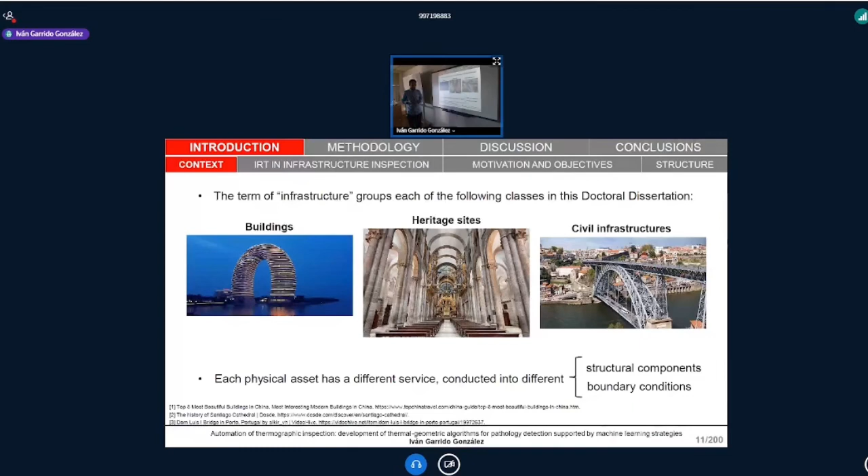In this doctoral dissertation, the infrastructure classes analyzed are the following: first, buildings that provide comfort and habitat to people; heritage sites that evidence the evolution of humanity and provide cultural satisfaction and economic benefits through tourism; and civil infrastructures that enable communication among people. Each physical asset has a different service, different structural components, and different boundary conditions.

In the absence of good maintenance, different surface and subsurface pathologies can appear depending on the service provided, the structural components, and the boundary conditions of the infrastructure under study. These forces can damage the structural health of any type of infrastructure, can prejudice the health and comfort of building users, and can increase energy demand in buildings.

The most severe ones are analyzed in this doctoral dissertation: that is, moisture, cracking, thermal bridge, and air infiltration.

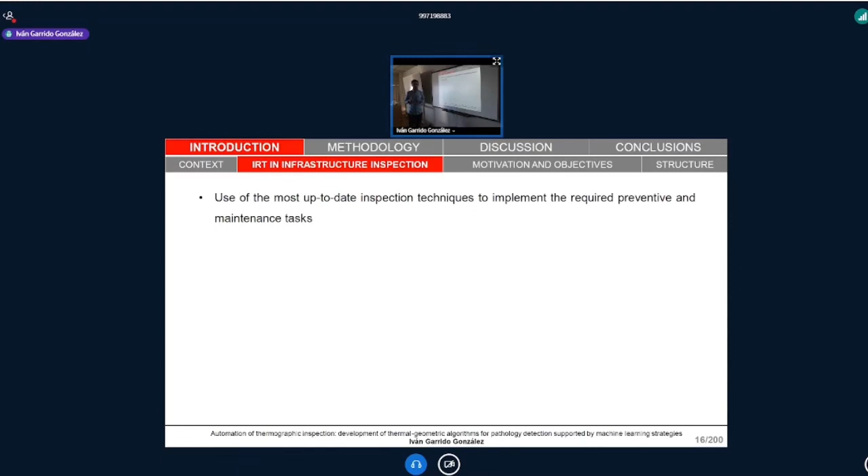For that, the use of the most up-to-date inspection techniques to implement the required preventive and maintenance tasks is necessary in order to avoid or reduce the negative consequences of these pathologies.

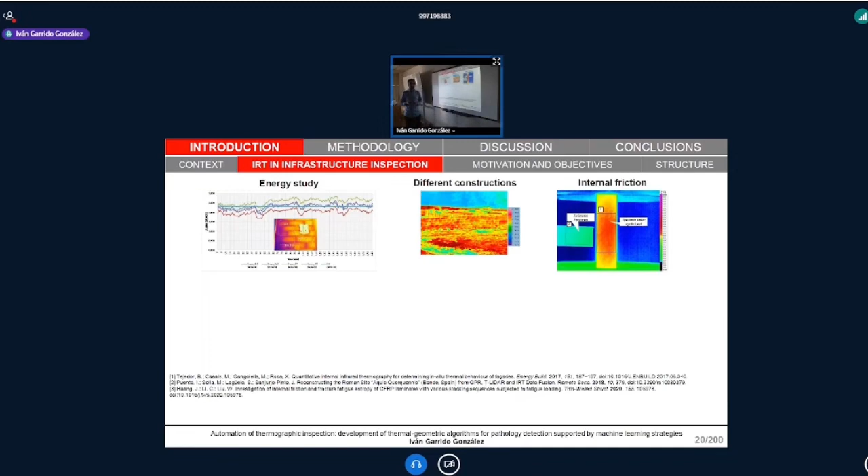In particular, infrared thermography has the ability to identify surface and subsurface pathologies based on the different thermal behavior between a pathology region and pathology-free regions of the infrastructure under study, allowing, for example, to perform an energy study of a building, to differentiate different types of construction in an archaeological site, to investigate internal friction in civil infrastructures under different fatigue loads, and of course to identify the above cited pathologies: moisture, cracking, thermal bridge, and air infiltration.

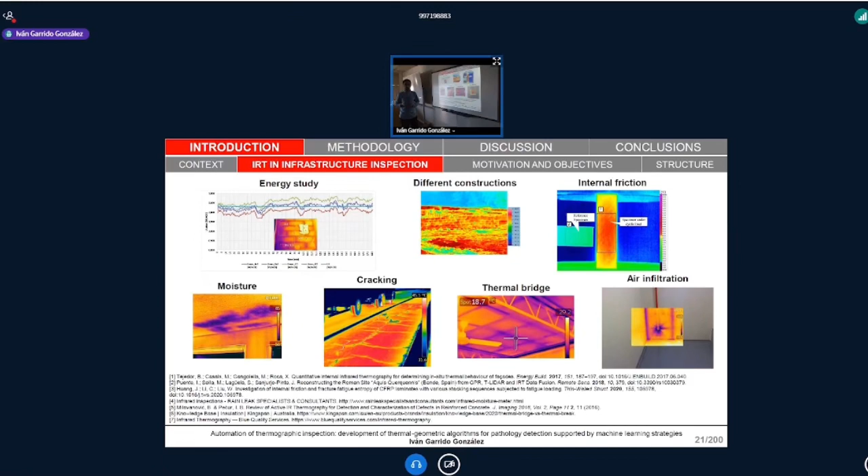So the motivation of this doctoral dissertation arises from the high importance of infrastructures, the high importance of identifying and thermally characterizing surface and subsurface pathologies, especially the most critical ones, and from the benefits of infrared thermography as an inspection technique. This leads to the main objective of this research, which consists of the automation of the automatic detection, delimitation, quantification, and thermal characterization of different pathologies in buildings, heritage sites, and civil infrastructures.

Automatic, due to the following main points. First, due to the benefits of automation in the interpretation of these results, speeding up this interpretation, especially in online inspections, and reducing the possible errors caused by operator subjectivity. Also, due to the increasingly important role of machine learning models in the automation of problem solving, and because automation of infrared thermography interpretation in infrastructure is a recent topic in the state of the art nowadays.

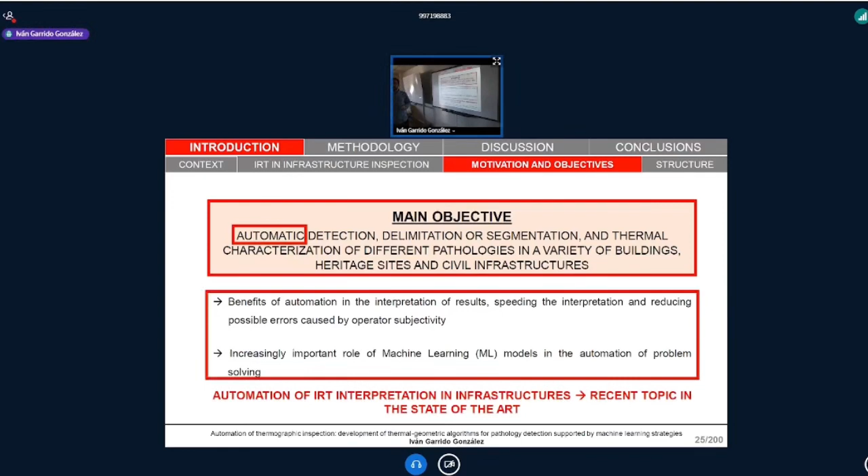This leads to three main contributions of this doctoral dissertation. The first point consists of providing exhaustive reviews of the most recent infrared thermography acquisition and post-processing procedures and infrastructure inspection, in the absence of such reviews in the state of the art.

The second contribution was the development of different new automatic thermal image processing algorithms applied to infrastructures. And finally, the third and last contribution was the presentation of the first combination of automatic thermal image processing algorithms with machine learning models.

This leads to five different specific objectives related to these contributions: the first specific objective relates to the first main contribution, the second to fourth specific objectives relate to the second contribution, and the fifth and last specific objective relates to the third main contribution of this doctoral dissertation.

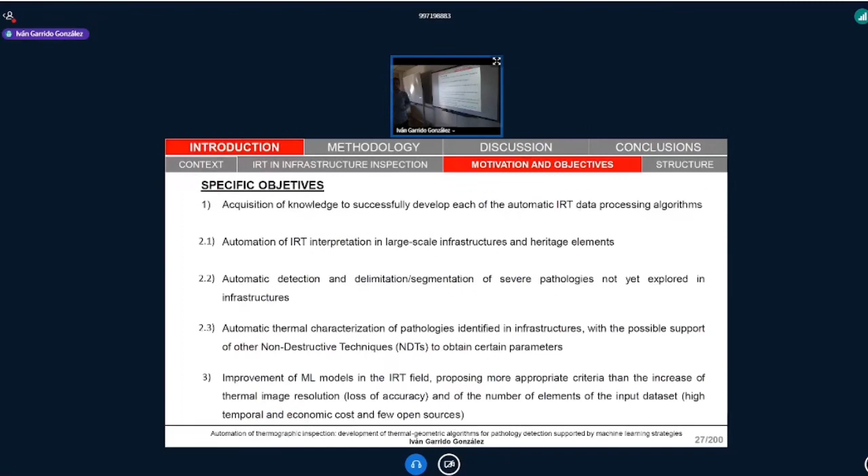So let's move on to the explanation of the structure of the methodology of this research.

In chapter 2, we can see that it covers the two exhaustive reviews explained before. Chapter 3 explains the first automatic algorithm proposed in this research, and chapter 4 presents three different publications covering the second to the fourth algorithms proposed in this doctoral dissertation.

And finally, in chapter 5, it is presented the combination of machine learning models, specifically deep learning models, with automatic thermal algorithms.

So let's move on to chapter 2, specifically to the first exhaustive review published in the following paper.

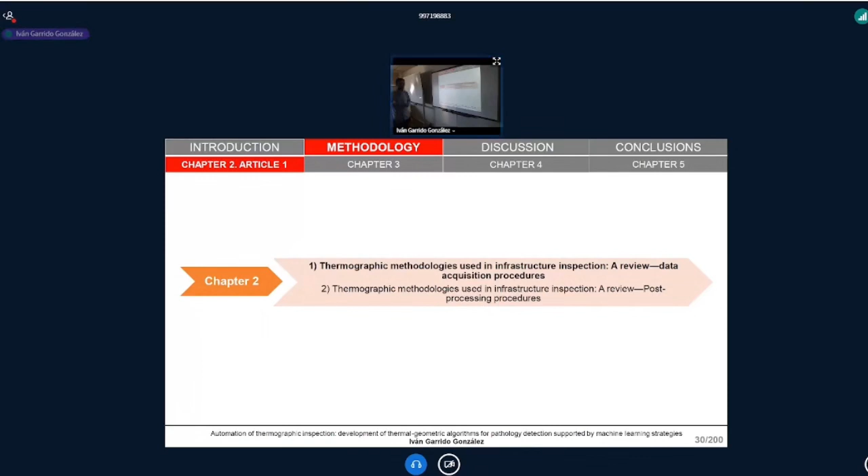The objective of this exhaustive review is the study of the most recent infrared thermography acquisition procedures in infrastructure inspection.

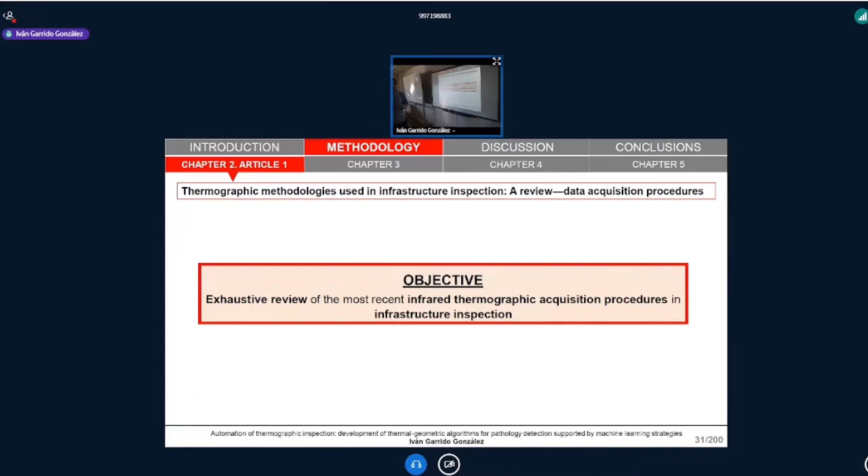The workflow is as follows. Firstly, the different existing infrared thermography approaches in the data acquisition stage when inspecting an infrastructure are searched and described. As a result, two different infrared thermography acquisition modes are found.

The first one, passive infrared thermography, consists of the measurement of the radiation emitted by the body when the body receives thermal excitation equal or less than that generated by solar radiation.

Active infrared thermography consists of the measurement of the radiation emitted by the body when the body receives thermal excitation higher than that generated by solar radiation.

Finally, similarities and differences among the most recent infrared thermography experimental setups are described. As a result, we found that there is great heterogeneity between the different experimental setups.

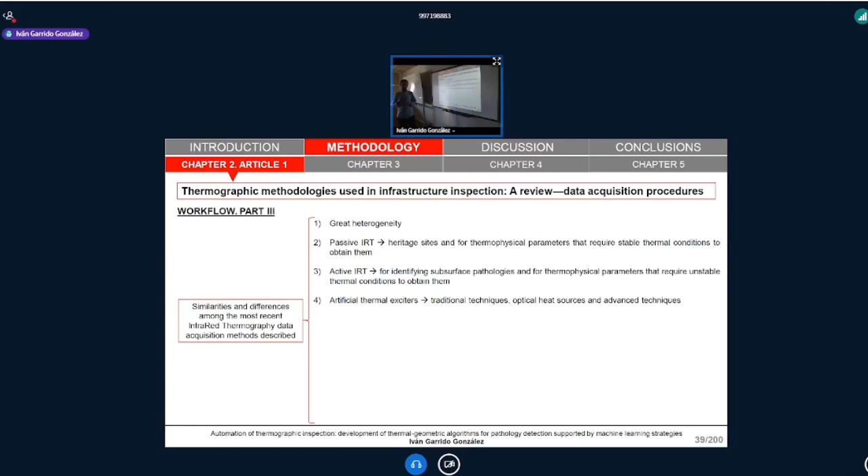But solar radiation is the predominant heat source in passive infrared thermography, especially using this type of natural heat source either during sunrise or sunset for pathology identification, due to the thermal changes reaching their peak during this time.

As for the type of heating, conventional thermography, step heating, pulse thermography, and lock-in thermography are the most common ones.

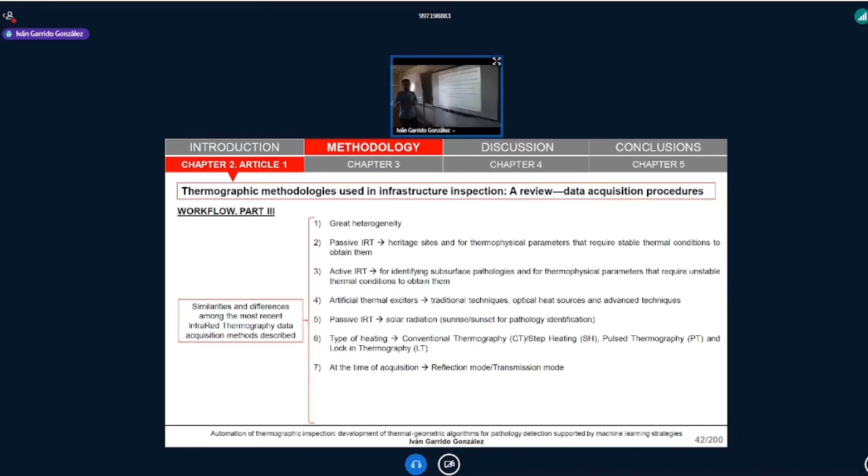Regarding the placement of the infrared thermal camera and the thermal exciter, they can be placed either on the same side of the infrastructure, reflection mode, or on opposite sides of the infrastructure under study, transmission mode.

When the objective is to identify surface pathologies, pulse thermography and reflection mode are the more predominant experimental setups. And when the objective is to identify subsurface pathologies, conventional or lock-in thermography and transmission mode are the most predominant experimental setups.

This first exhaustive review was published in the International Journal Infrared Physics and Technology in 2020.

So let's move on to the second exhaustive review that was published in this second paper.

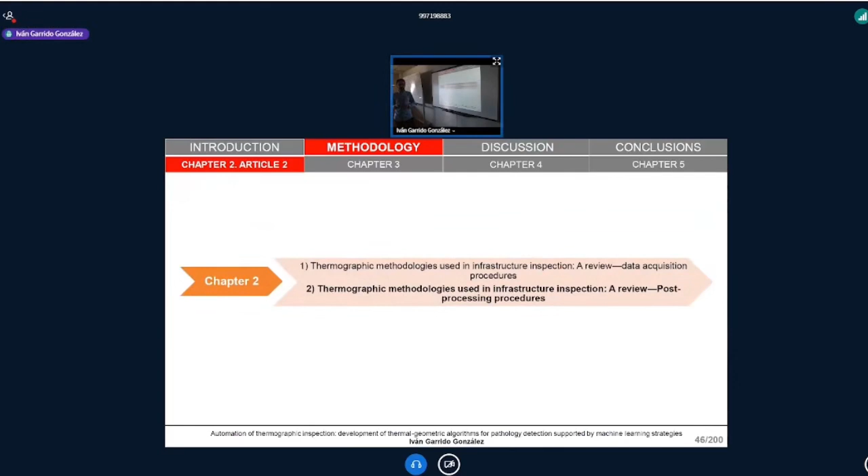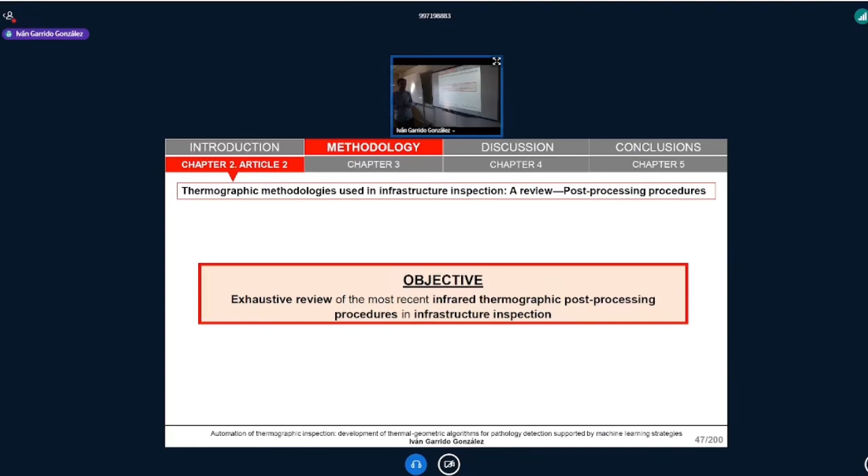The objective of this second exhaustive review is to focus on the more recent infrared thermography post-processing procedures in infrastructure inspection. Here, the workflow is as follows.

Firstly, again, the different existing infrared thermography approaches in the post-processing stage of infrastructure inspection are searched and described. As a result, again, we have two different modes, in this case two post-processing modes.

The first one, qualitative analysis, is when the objective is to detect the position, delimit, or segment the pathology area. And when the objective is to characterize the pathology of the infrastructure or to estimate the pathology depth, the corresponding post-processing mode is quantitative analysis.

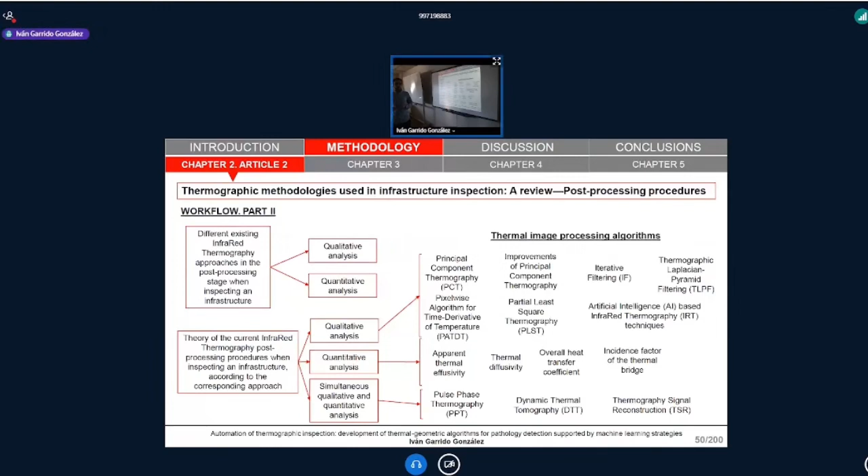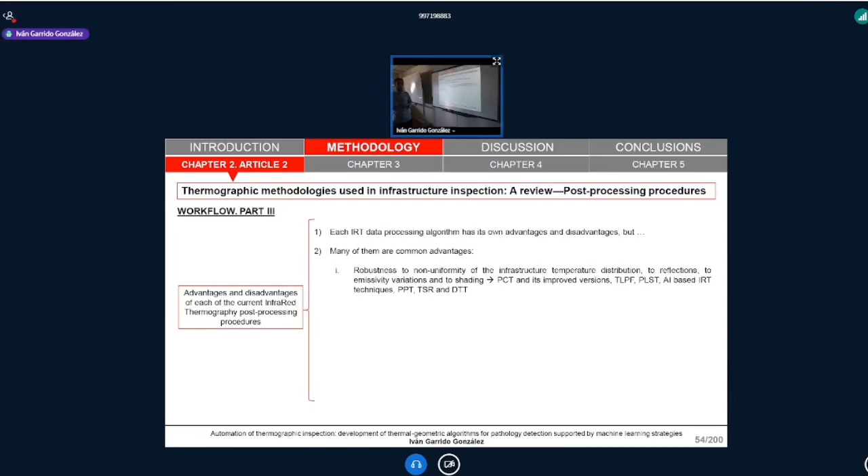However, many of them share common advantages, such as robustness to non-uniformity of the infrastructure temperature distribution, to reflections, to emissivity variations, and to shading. Another advantage is that some algorithms have the ability to perform simultaneous qualitative and quantitative analysis.

Unfortunately, many of them also share common disadvantages, such as the need for a thermal image sequence without the possibility of punctual inspections. Another disadvantage is the absence of delimitation of the contours or segmentation of the detected pathologies, and the need for manual interpretation of the results.

This second exhaustive review was published in the International Journal Applied Energy in 2020.

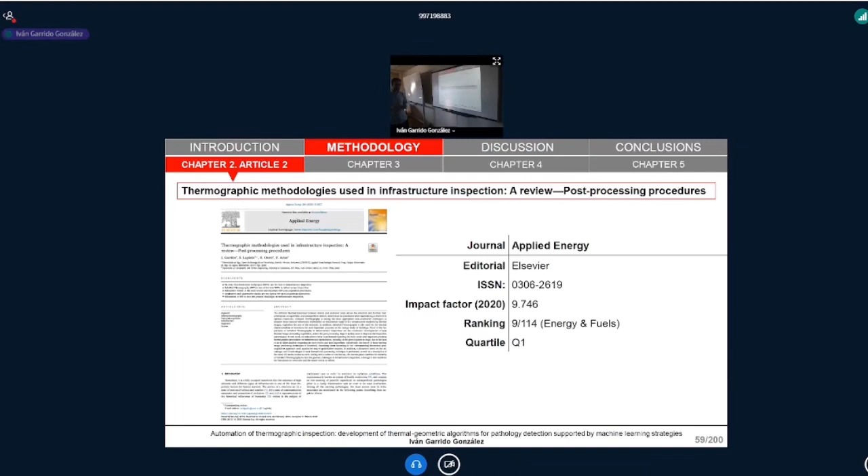So, with the acquisition of the state-of-the-art, we are ready to develop the different algorithms. The first one was published in the following paper, in chapter 3.

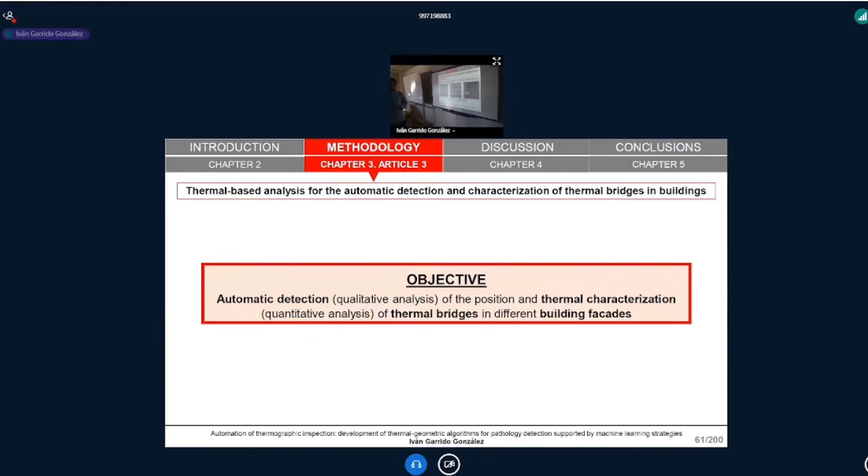The objective of this first automatic algorithm consists of the automatic detection and thermal characterization of thermal bridges in different building facades. For that, different punctual measurements are performed from a mobile ground platform using solar radiation as thermal excitation. The thermal images are processed with pixel values in 8-bit format.

As for the workflow, it is as follows. First, a photogrammetry technique is applied, specifically an image rectification process, in order to correct the projection, perspective, and radial distortion introduced by the lens of the infrared camera on each raw input thermal image. With this, it is possible to calculate the pixel size on each thermal image in metric units, and in this way, the width or height of each thermal bridge in metric units.

Here we can see the core of the image rectification process. It is the equation called plane projective transformation, where the coefficients of the projective matrix are calculated by 4 control points on each thermal image, whose dimensions in metric units need to be known previously.

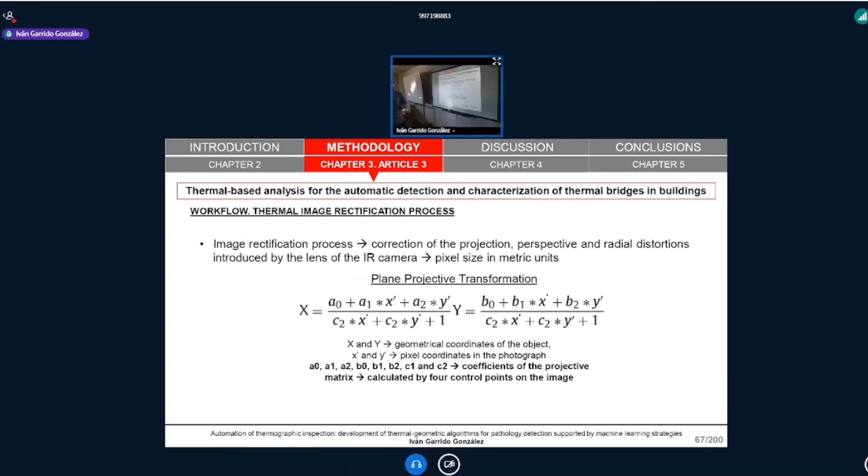Then two one-dimensional median filters are applied on each rectified image in order to reduce noise. Then on each image, different local maximums are grouped into different lines. It should be noted that these lines are candidates for thermal bridges, consisting of a line containing groups of pixels with temperature values very different from their surroundings.

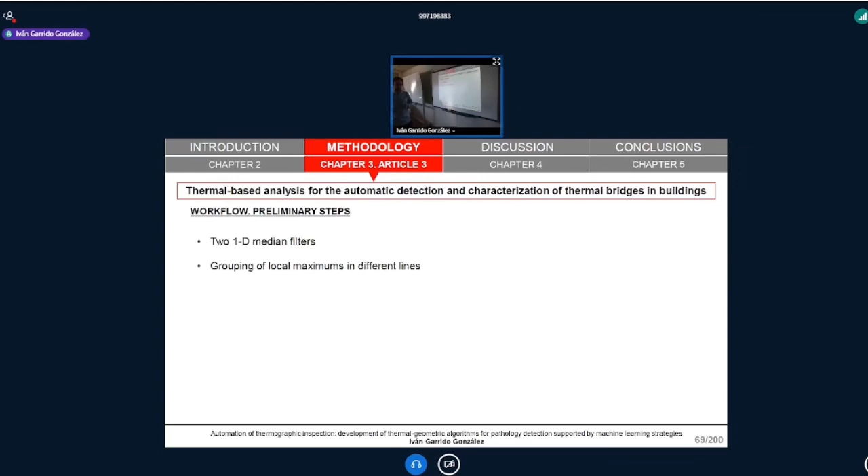Then different criteria are applied, as can be seen in this slide. In the geometric criterion, two predefined thresholds are applied on each candidate line, considering that the cross section of each candidate line has to exhibit a Gaussian bell regarding its temperature distribution. If it does not exhibit this temperature distribution, it is discarded as a real candidate line for a thermal bridge.

In the first thermal criterion, two predefined thresholds are applied related to the temperatures. Specifically, the difference between each candidate line and its surroundings is calculated in order to eliminate noise, reflections, and shading.

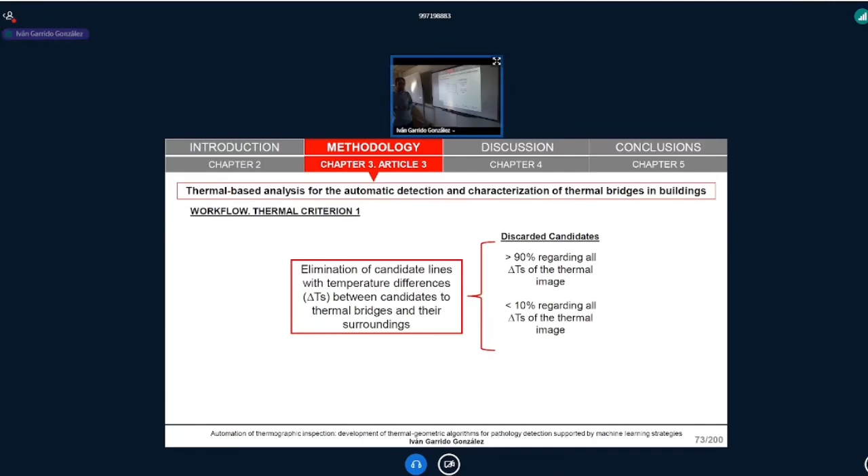In the second thermal criterion, related to the linear thermal transmittance in each candidate line, a predefined threshold is again applied. The equation for linear thermal transmittance calculation, shown in this slide, uses the meteorological conditions of our study area, different tabulated formula values, the temperature of each candidate line, the width or height of each candidate line in metric units thanks to the previous image rectification process, and the surrounding temperature of each candidate line.

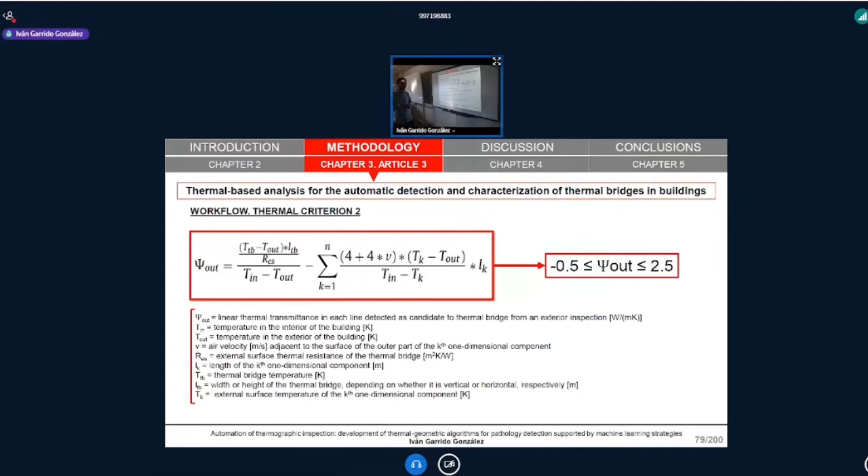As a result, an increase in F-score equal to 15% is achieved regarding the state of the art, which only used the geometric criterion and the first thermal criterion, without applying the second thermal criterion and without applying the image rectification process.

Using the criteria in this optimal sequence, we obtained overall precision, recall, and F-score values between 55% and 68%.

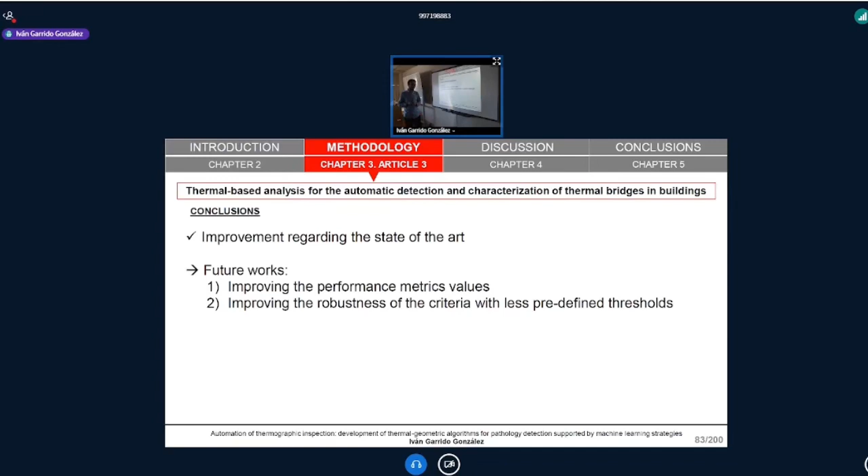As conclusions, an improvement regarding the state of the art is achieved. However, future work needs to improve the performance metric values and the robustness of the criteria with fewer predefined thresholds. This first algorithm was published in the International Journal of Energy and Buildings in 2018.

So let's move on from the second to the fourth algorithm. All these algorithms, in addition to automatic detection, have the ability to automatically delimit or segment the pathology areas. Let's go to the first one.

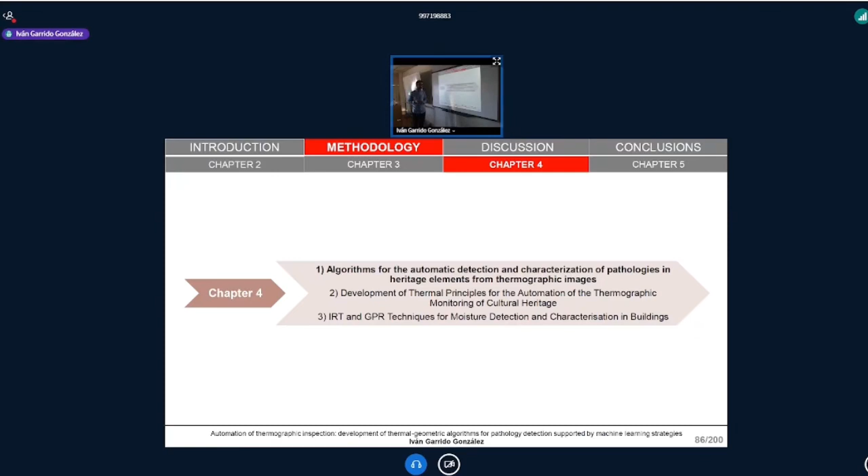It was published in the following paper. The ability of this second algorithm consists of the automatic detection of the position, the automatic delimitation of the areas, and the geometric characterization of moisture in different heritage infrastructures.

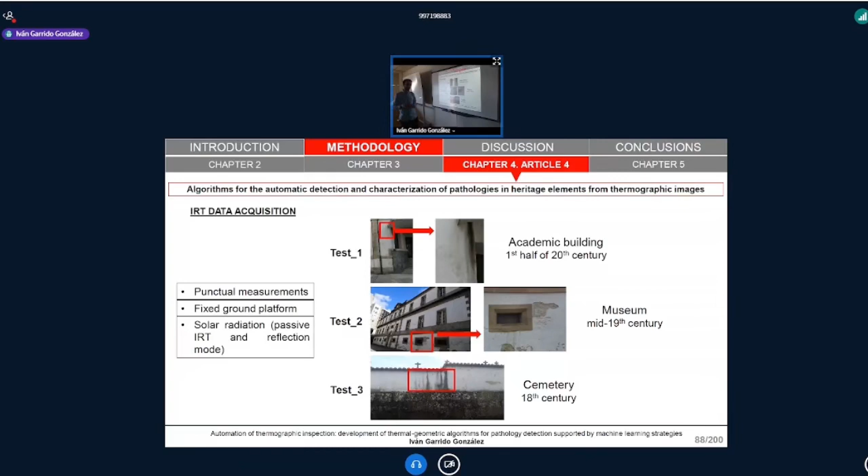For that, again, different punctual measurements are performed from a fixed ground platform using solar radiation as a thermal exciter. As can be seen, an academic building, a museum, and a cemetery are the surfaces under study in this research. Here we can see the different thermal images processed, with pixel values in 8-bit format.

As for the workflow, the solution of this second algorithm is similar to the previous one. That is, the temperature distribution of the pathology thermal footprint on the thermal image exhibits a Gaussian bell, but it is also considered that the thermal footprint of the pathology filtration on our surface under study will exhibit another Gaussian bell, where the smaller, lowest one is always related to the pathology Gaussian bell, because generally the pathology thermal footprint covers less area relative to the total area of our thermal image under study.

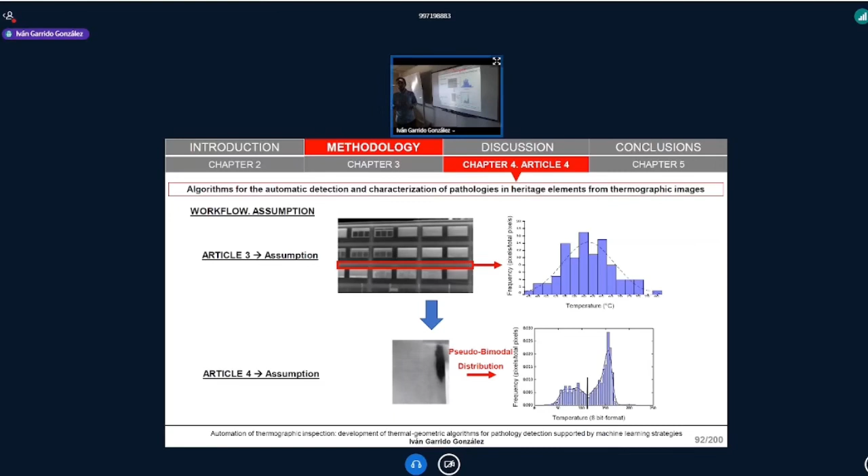So the global thermal image histogram will exhibit a pseudo-bimodal distribution. With this new assumption, the different steps are as follows.

The new first thermal criterion consists of adjusting the shape of each input thermal image by a polynomial equation. With this adjustment, the number of different maximum peaks is counted. If there are two maximum peaks, it is considered that this specific thermal image has pathology thermal footprints; otherwise, it is discarded as a candidate with pathologies. When there are two maximum peaks, the absolute minimum value between them is calculated.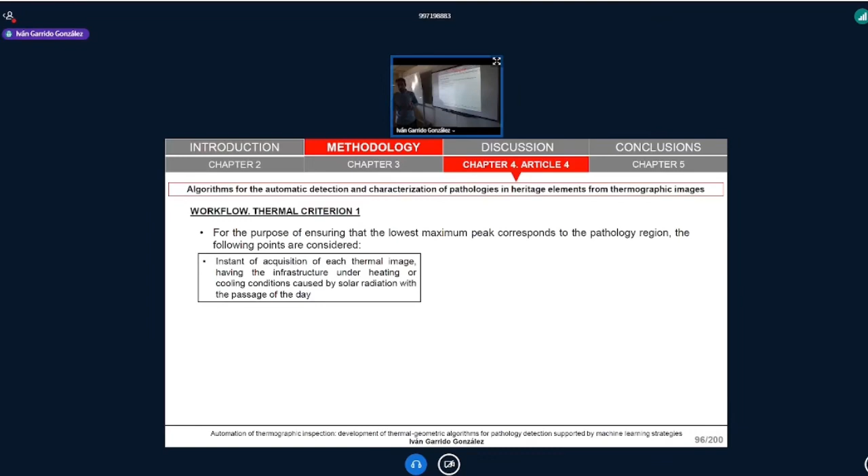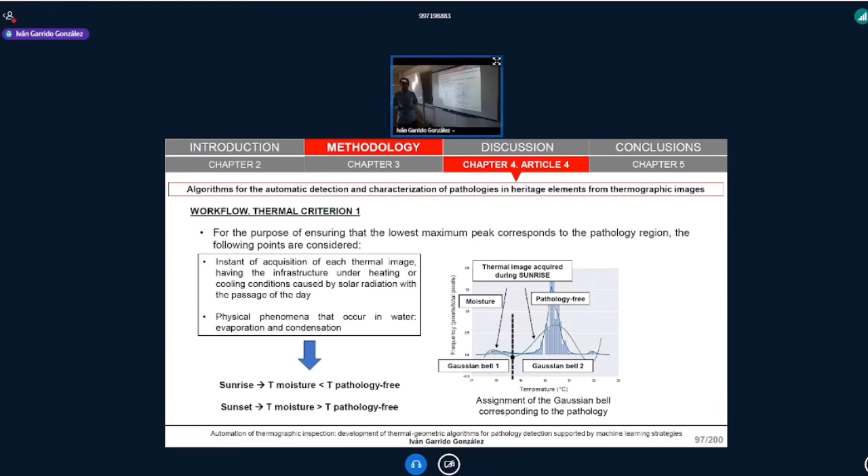To ensure that the lowest maximum peak corresponds to the pathology region, the following points are considered in this first new thermal criterion: first, the instant of acquisition of each thermal image, given that the infrastructure undergoes heating or cooling conditions caused by solar radiation over the course of the day, and considering the physical phenomena that occur in water, namely evaporation and condensation. As a result, during sunrise the moisture temperature is lower than the pathology-free region temperature due to evaporation, and the moisture temperature is higher than the pathology-free region temperature during sunset due to condensation. This allows us to ensure whether the lowest peak belongs to the Gaussian bell or to noise.

Then, in the new second thermal criterion, different candidates for moisture areas are grouped on the corresponding thermal image. In this case, the grouped areas are not lines, as in the previous first algorithm.

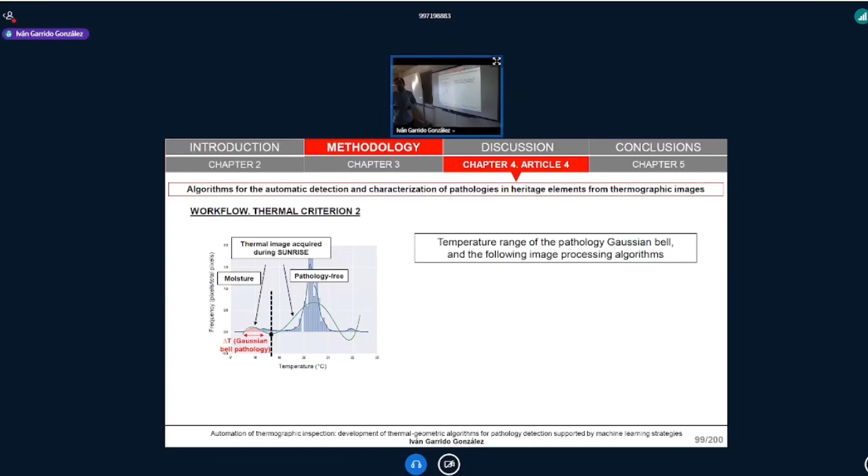From the temperature range of the pathologic Gaussian bell, estimated by the previous thermal criterion, the following processing algorithms are applied: a morphological dilation process that consists of declaring a binary mask in order to differentiate pixel values that are inside the pathology Gaussian bell from those that are outside it. Then the nearby pixels are joined into a single area.

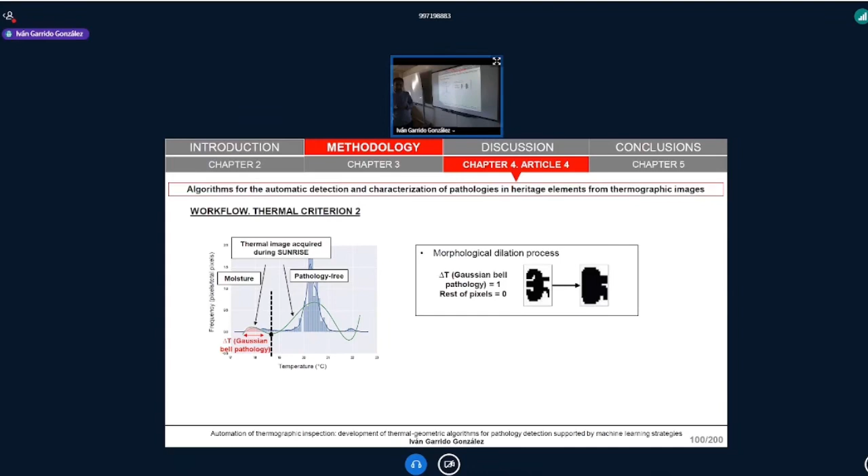The second algorithm consists of applying a connected component method in order to differentiate the different candidate areas with a different label number, as we can see in this example. And here we can see the result on one of our input thermal images, where the candidate areas are delimited by a red line contour.

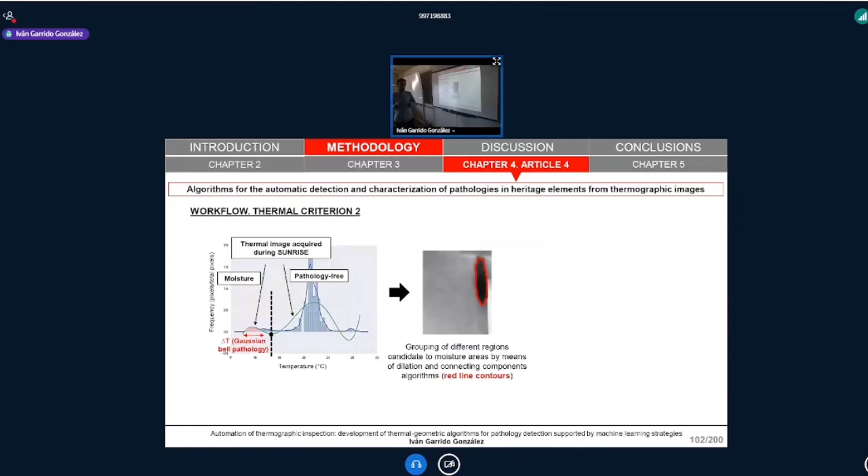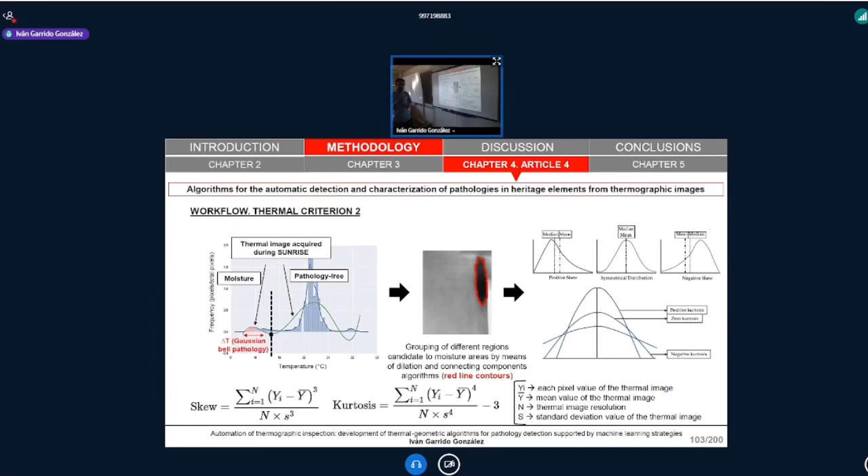Then, at the end of the second thermal criterion, the skewness and kurtosis values of each temperature distribution of each candidate area are calculated. Skewness is a parameter that represents the degree of distortion of a data distribution relative to a symmetrical distribution. Kurtosis is a parameter that represents the proximity of the tails of a data distribution to the tails of a perfect Gaussian bell.

As a result, a pseudo-bimodal distribution of all the histograms of all the input thermal images is obtained, so the algorithm works well.

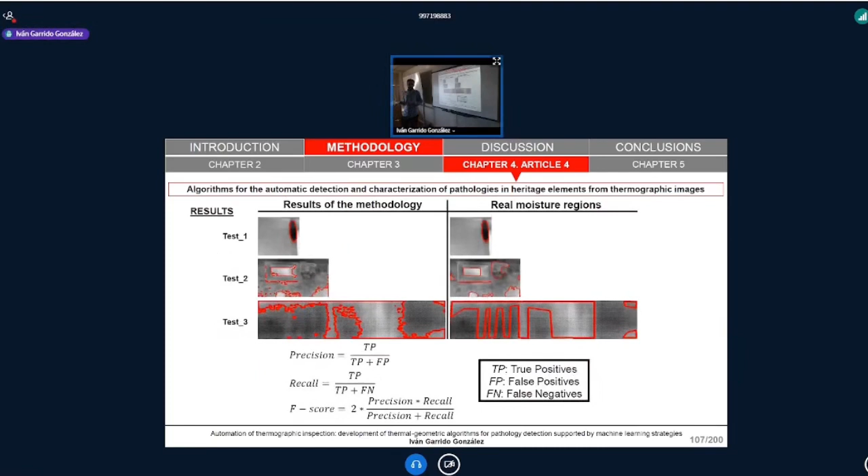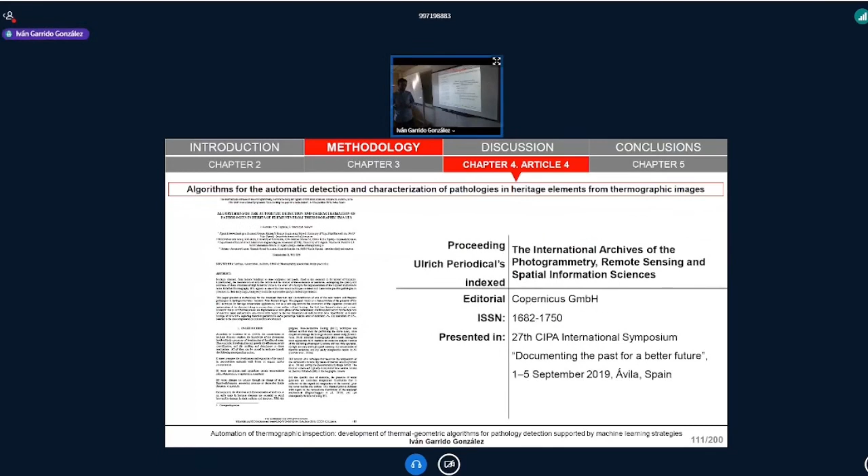This second algorithm was presented at the 27th CIPA International Symposium in 2019.

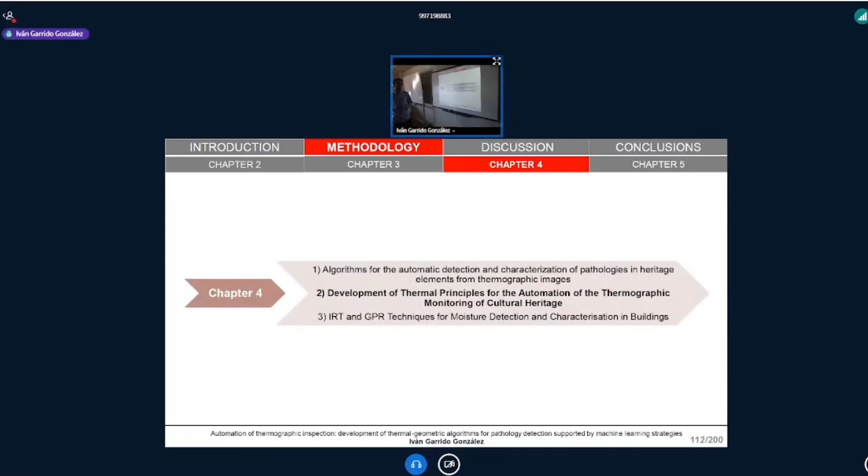Let's move on to the third algorithm developed and described here, published in the following paper. In this case, the objective consisted of the automatic detection of the first appearance of the thermal footprint, the automatic segmentation of the areas from its first appearance, and the classification between harmful and non-harmful internal water in a heritage element.

For that, 5 different monitoring measurements are performed, simulating different real scenarios at laboratory scale, from fixed inspection and using stove simulating solar radiation. The stove applied on the back of our object under study, which consists in this case of a mosaic, where the front surface, the decorative layer, is the surface of interest, with infrared thermal camera, where the thermal images are processed in this case with pixel values in degrees Celsius.

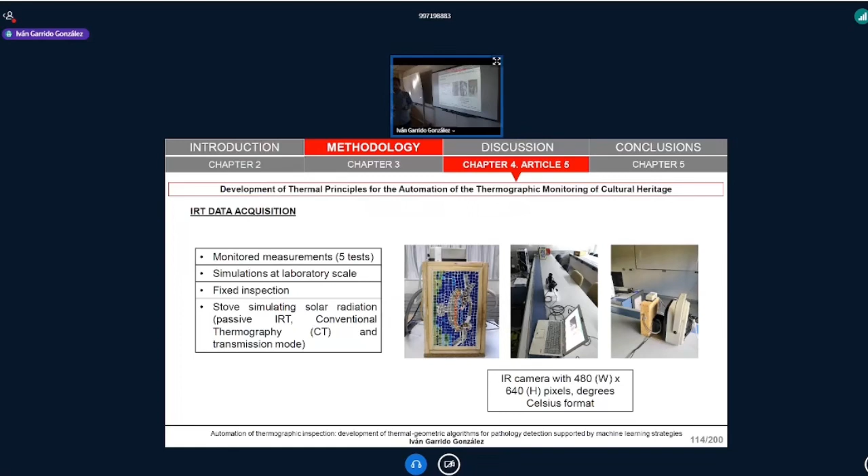The introduction of water inside the mosaic is performed in 2 different ways. The first, in order to simulate propagation of internal moisture, by means of an internal sponge connected by a duct, as can be seen in this slide. The second way introduces the water by means of a closed circuit connected to a water tank, in order to simulate the circulation of internal pipes in a building, for example, as can be seen in this slide.

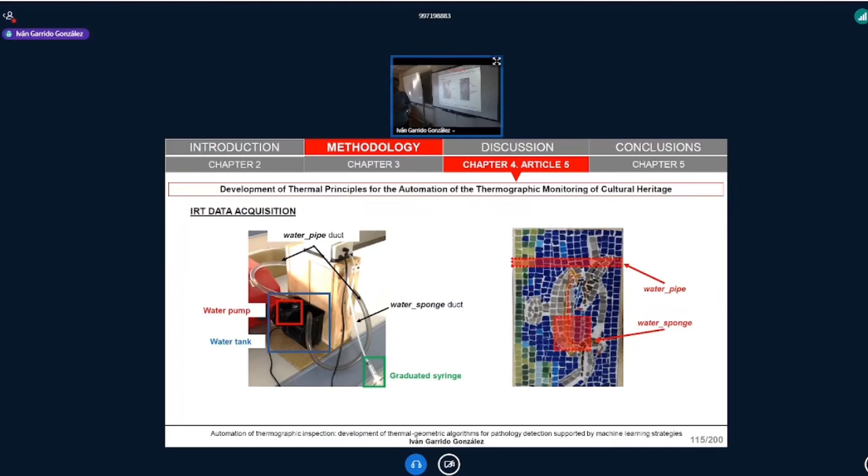As for the test, we can see here in more detail, where all the tests consist first of a heating period applied by the stove, with a continuous cooling period, where the last and fifth test, with no internal water, is performed in order to compare with the rest of the tests. Regarding the rest of the tests, the internal water was introduced in different instances, where the first and third tests simulate non-harmful water to the mosaic, and the second and fourth tests simulate harmful water to the mosaic.

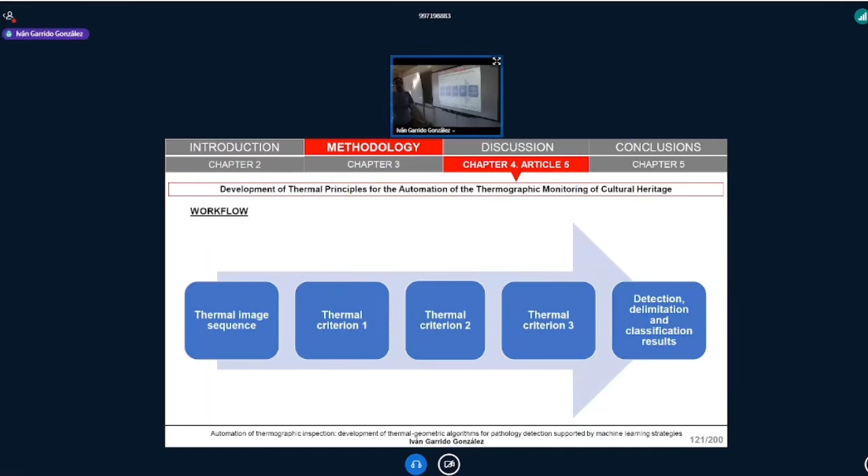As for the workflow, it is as follows, very similar to the previous algorithm. First, the new thermal criterion is focused on the first task, based on the assumption that there is a transition of the temperature distribution shape from no thermal footprint of any pathology to the maximum expansion of such thermal footprint along the thermal image sequence under study. In other words, from a normal temperature distribution when no thermal footprint of any pathology appears on the surface under study, to a pseudo-bimodal temperature distribution, as was the assumption of the previous algorithm.

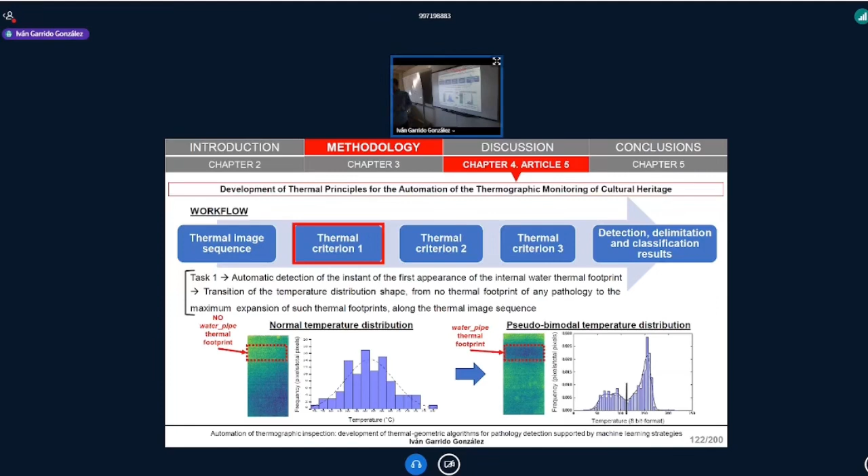Then the new second thermal criterion addresses the second task, following the same assumption as the first thermal criterion. In this case, we overlap the histograms of the different thermal images in our sequence under study, in order to search for different intersection points on our overlapping histograms. Each intersection point represents the pixel value of the contours of our pathologies.

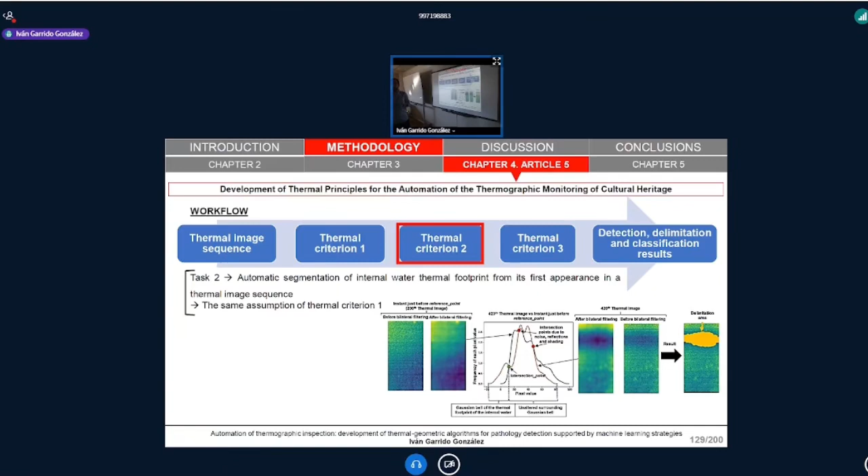In order to discard false intersection points related to noise, shading, and reflections, the previous assumptions regarding the instant of thermal acquisition, and regarding the different phenomena of water - condensation and evaporation - are considered in this case, in order to discard which intersection points are really related to our pathology and which are false.

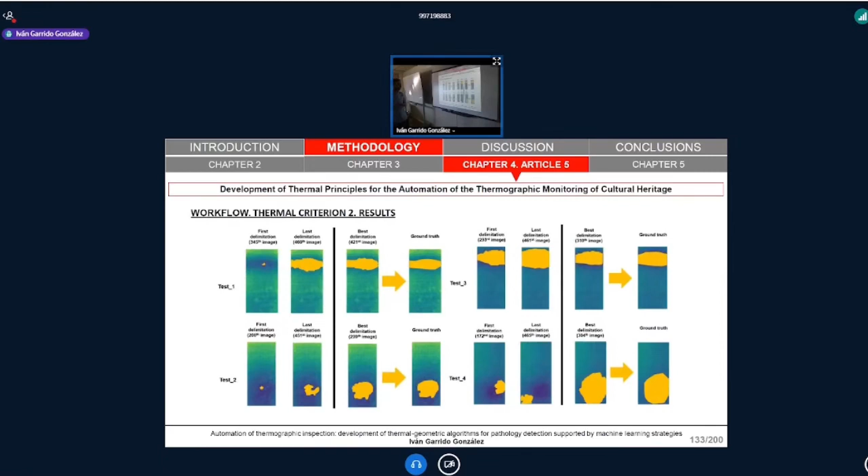As a result, we can see some examples of our segmentation process applied to this mosaic, where we obtain average and standard deviation values for each different test. Some poor segmentation results are caused by the high reflectivity index of the tested surface of the mosaic.

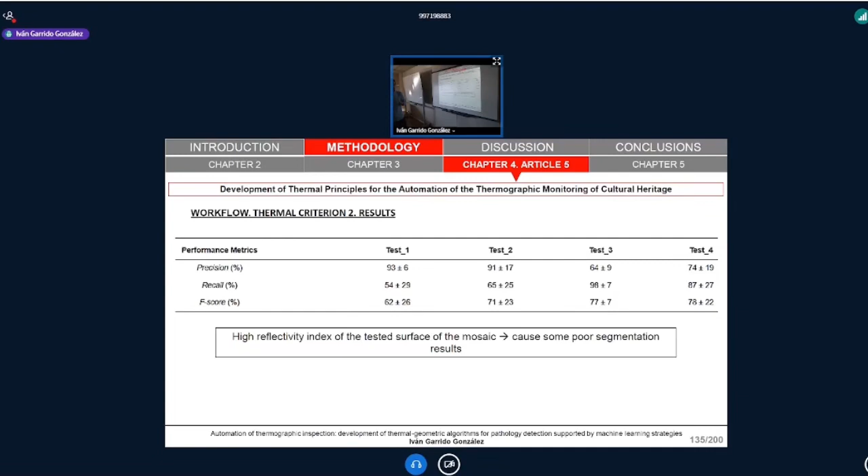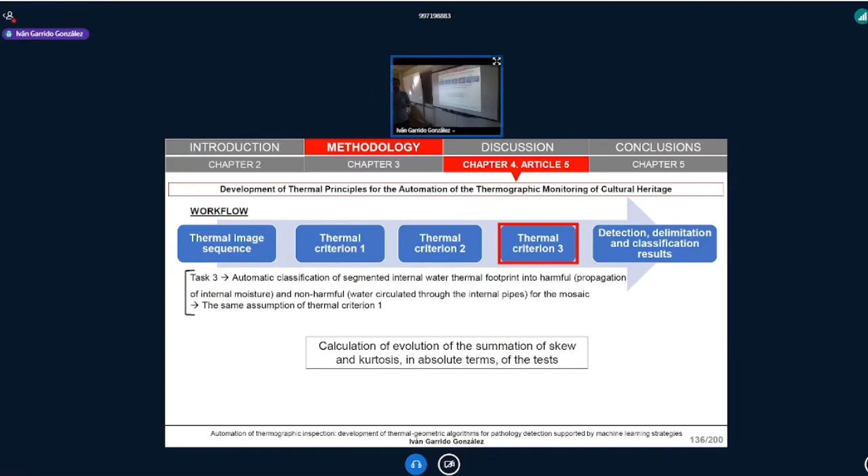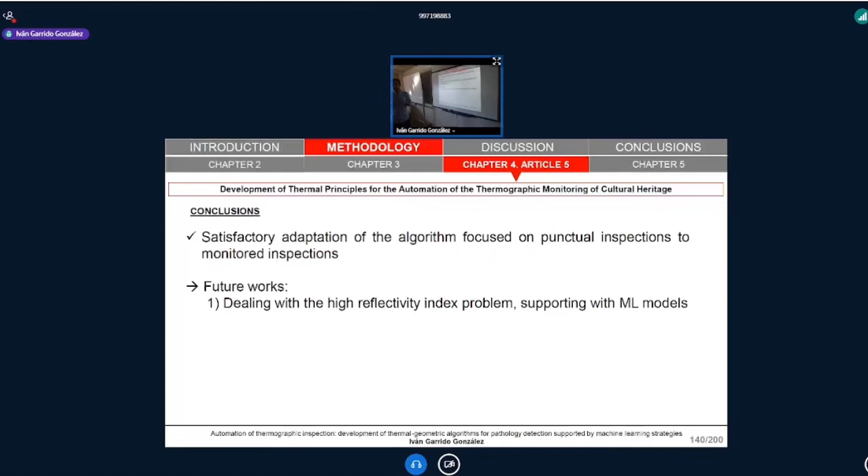Conclusions: a satisfactory adaptation of the algorithm, focused on punctual inspections, to monitoring inspections is achieved, and future works need to deal with the high reflectivity index problem, supported by machine learning models. This third algorithm was published in the International Journal Sensors in 2020.

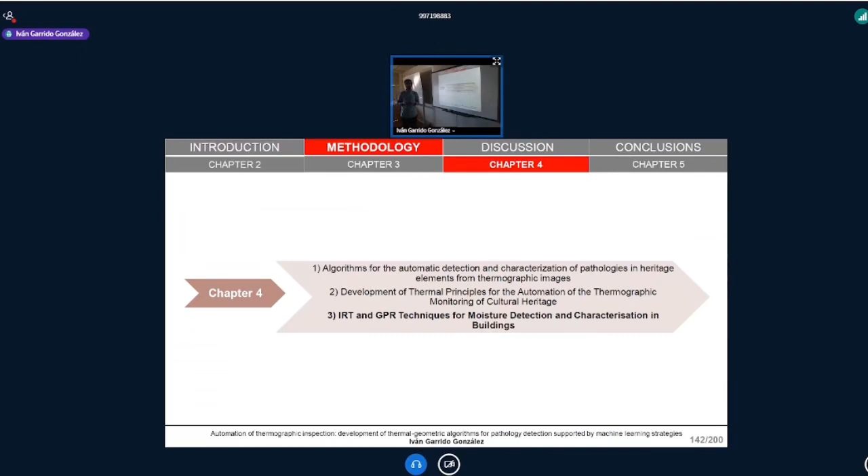Finally, let's go to our last and fourth automatic algorithm, published in this following paper. The objective of this last algorithm consists of the joint application of infrared thermography and ground penetrating radar for the detection and classification of moisture in interior walls of a building according to its severity level. Our algorithm is, of course, again automated, in this case with the automatic delimitation of the different moisture areas.

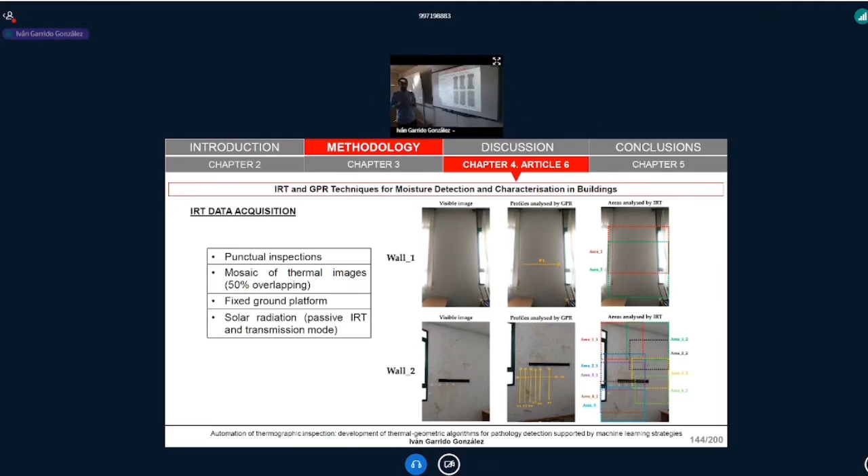For that, again, punctual inspections are performed, but in this case, several thermal images on the same surface in order to cover a larger area as a mosaic of thermal images from a fixed ground platform, using again solar radiation as thermal excitor. Here we can see that 2 thermal images are processed on the first internal wall and 9 thermal images are processed on the second wall, where the pixel values are in degrees Celsius format.

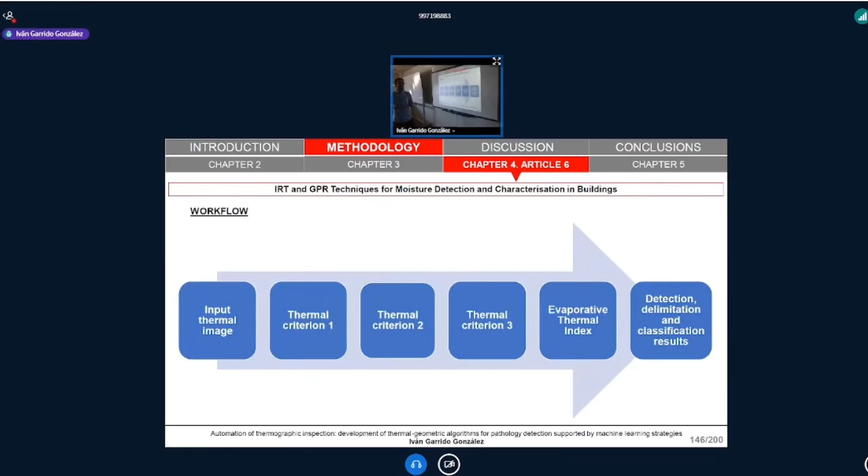As for the workflow, again it's very similar regarding the second and third algorithm. In this case, however, instead of considering a pseudo-bimodal temperature distribution like the second algorithm, it is considered a multimodal temperature distribution. We consider this more realistic, because we'll have the same number of Gaussian bells on our thermal image histogram as the different types of pathologies and severity levels on our surface, since depending on the type of pathology and severity level, the temperature behavior of our pathology's thermal footprint will be different among them.

So with this new assumption, the new first thermal criterion consists of the determination of possible Gaussian bell ends in the thermal image histogram. For that, we search for the different relative minimum values and inflection points, considered as these possible Gaussian bell ends.

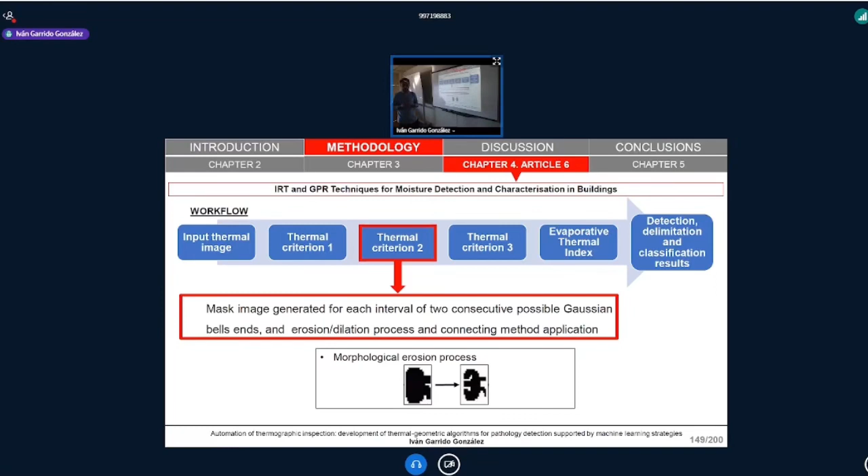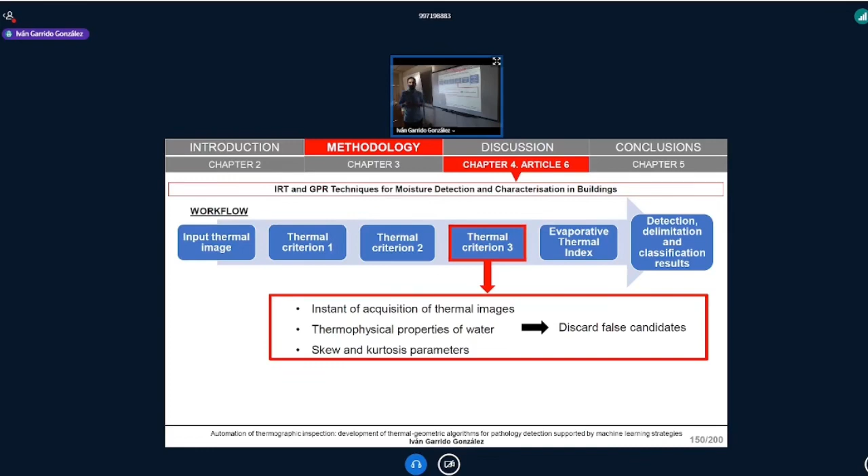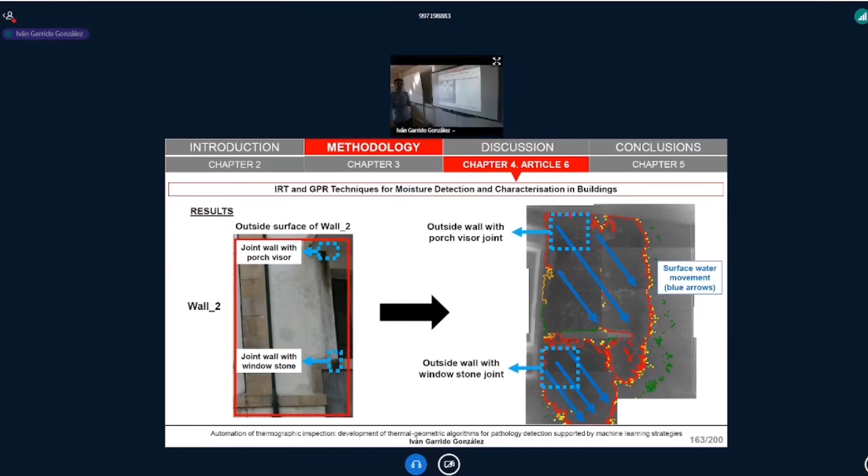As a result, with the previous calculation of our thermal parameter, it was possible for us to estimate the surface water movement on one of our 2 walls under study, as can be seen in this example. With the joint application of infrared thermography and radar, it was possible to discard any possible moisture signals in the first wall, comparing the different results between both inspection techniques.

Regarding the second wall, where surface water movement was estimated, with the joint application of both inspection techniques it was possible to interpret the water displacement between the outside and inside of our wall under study, and to estimate the relative depth of water, thanks to ground penetrating radar's ability to detect moisture in deeper layers outside the scope of infrared thermography, compensating infrared thermography's better ability to estimate moisture on the surface and shallow layers.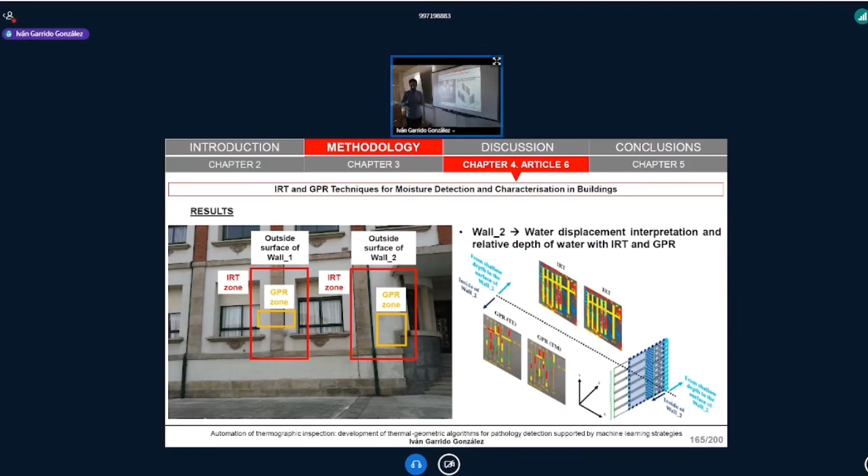As conclusions, an improvement of the algorithm robustness proposed in Article 4, that is our second algorithm for punctual inspections, is achieved. And more information and greater reliability can be gained by using more than one non-destructive technique. This fourth and last algorithm was published in the International Journal Sensors in 2020.

Finally, in Chapter 5, we present our first combination of deep learning models with thermal image processing algorithms. Specifically, the objective consists of the interaction of the latest state-of-the-art deep learning model for instance segmentation with two automatic infrared thermography data preprocessing algorithms, to improve deep learning model training for automatic detection and segmentation of surface and subsurface pathologies, in this case in two heritage elements belonging to the same family, marquetry.

For that, four monitoring measurements are performed from a fixed inspection, using two different thermal exciters: the first one, flash lamps, and the second one, halogen lamps. At the end we will have two tests on each marquetry under study, one with halogen lamp and another one with flash lamp.

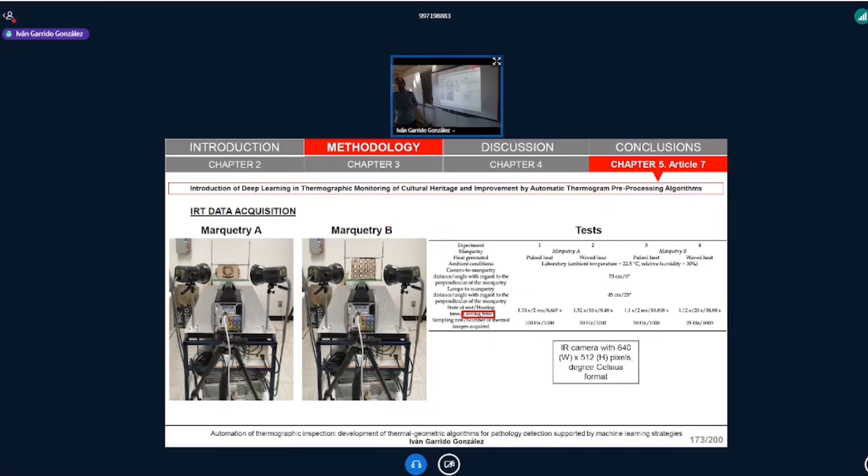It should be noted that in all the tests, first we apply the heat with the lamps on the back, on the front surface of the marquetries, but the only interval of interest for us is the cooling time. In other words, the cooling period, because during the heated time we have the thermal footprint of the lamps, and this thermal footprint is not of interest in our work.

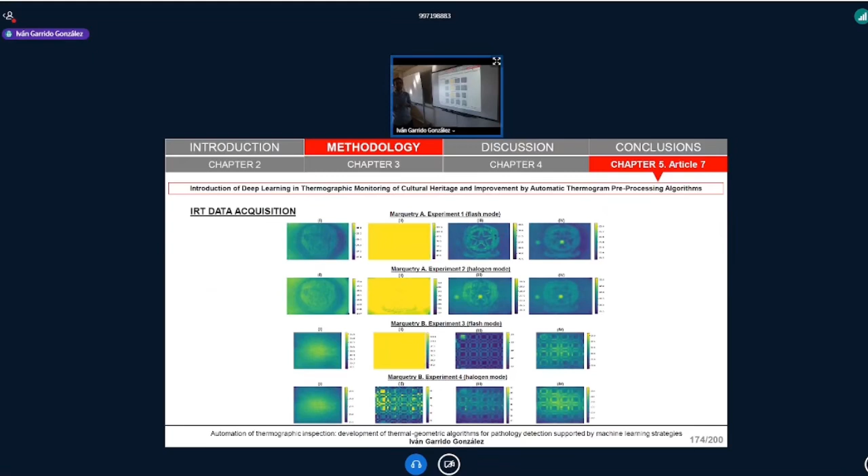Here we can see some examples of the thermal images acquired on each test performed. As for the workflow, it is as follows: first, the two automatic thermal image processing algorithms are applied on our thermal image sequences. This one is called the optimized Gaussian model for non-uniform background heating and cooling compensation.

With this, it is possible to compensate the non-uniform background heating and cooling of our thermal images, because the nature of the heat distribution on our material is like a Gaussian bell propagation.

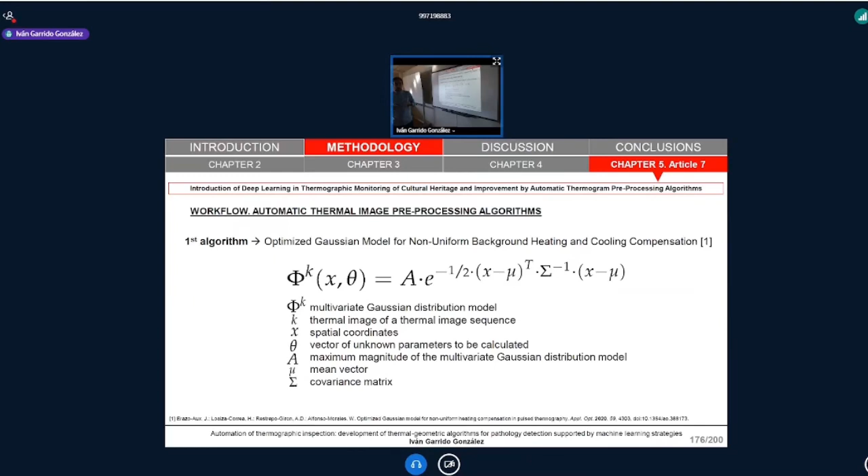With this compensation of the non-uniformity of temperature, it is possible to increase the contrast between the pathology thermal footprints and the pathology-free regions on our surface under study, as can be seen in this example.

As for the second algorithm, it is an adaptation of the segmentation step of the algorithm proposed in Article 5, or Paper 5. That is the third algorithm developed and described before.

It should be noted that the adaptation consists of, after the segmentation of the areas of our pathology thermal footprints, applying an intensity transformation operation equation in order to increase further the contrast between the pathology areas and the pathology-free regions on our surface under study, as can be seen in this example.

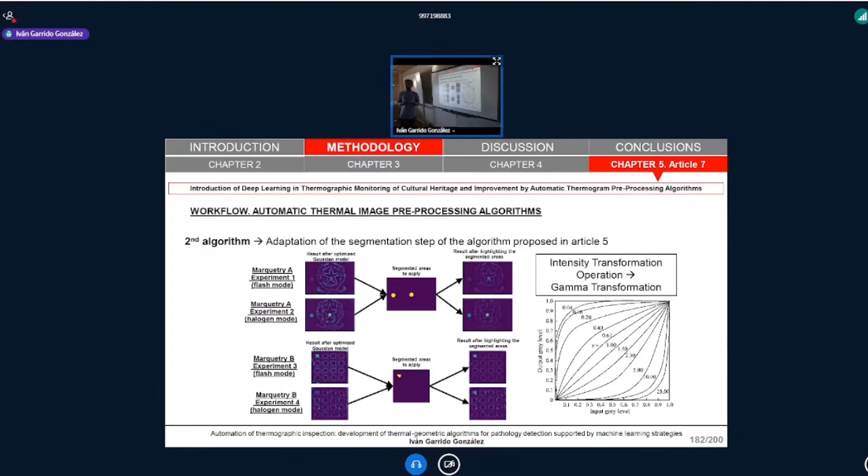As for the deep learning model selected, Mask Region Convolutional Neural Network is the one chosen, which provides bounding box coordinates, class label, and a mask for each object detected in our input image.

As a result, here we can see two different graphs. On the left, the training loss values' evolution regarding the training dataset, using as input the raw thermal sequence and the thermal image after the improvement of the contrast.

The improvement of the contrast corresponds to the orange line, and the raw sequence corresponds to the blue line. On the right, the same evolution of the loss value, but regarding the validation dataset. Again, the blue line is using as input the raw thermal image sequences, and the orange line using as input the thermal images after the previous application of our two algorithms.

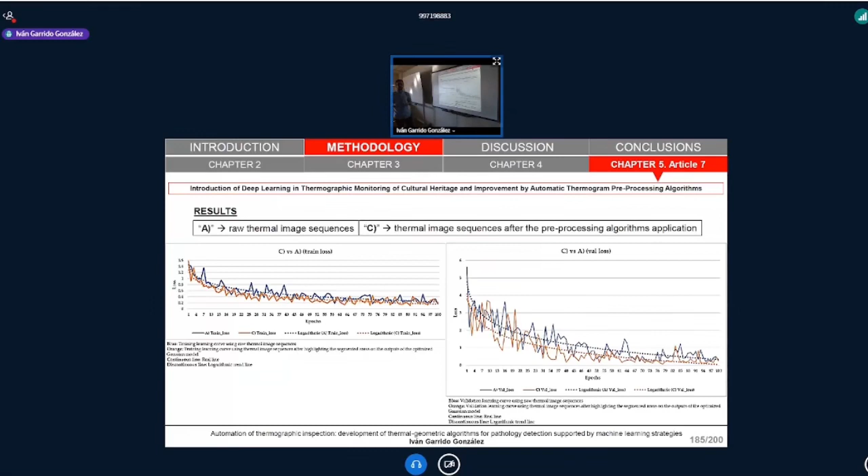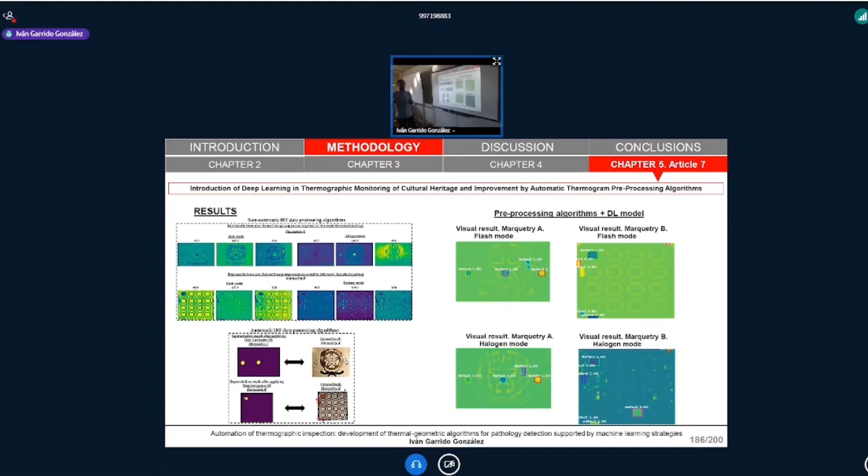If we compare the results of the segmentation of our subsurface and surface pathologies regarding the state of the art, we realize that our combination is better, especially in order to delimit the deepest subsurface pathologies.

If we calculate the average precision, recall, and F-score values, effectively we can see that we have values close to 100%, specifically between 85% and 99%, if we see the numbers inside the different rectangles.

As conclusions, an improvement of the training of machine learning models, specifically deep learning models, combined with thermal image processing algorithms, is achieved. The most robust methodology of all the works of this doctoral dissertation is obtained with this combination. This combination was published in the International Journal Sensors in 2021.

Well, let's go to the discussion section, where the different tables represent the specific objectives addressed with the different published papers described in this presentation.

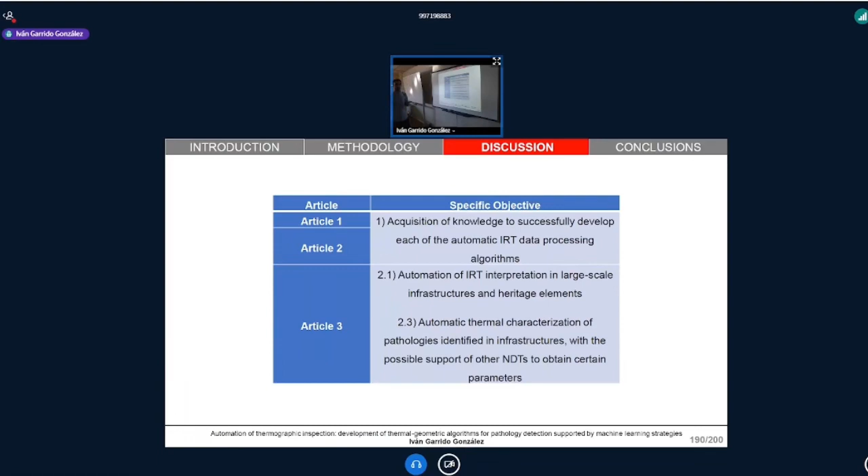We can see that with the first and second exhaustive review, it is possible to address the first specific objective. Meanwhile, with the first algorithm proposed, it was possible to address the second and third specific objectives.

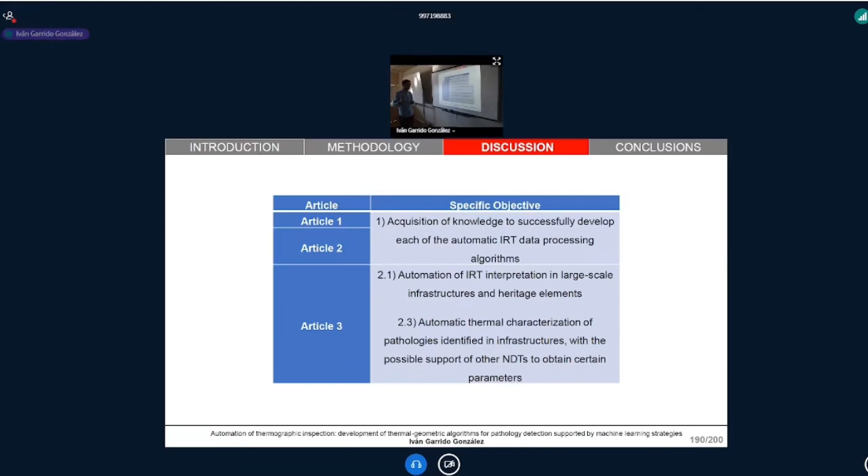With the second and third automatic algorithm, it was possible to address the second and third specific objective. With the fourth and last automatic algorithm proposed and described, it was possible to address the second, third, and fourth specific objective proposed in this research. Finally, with our combination, it was possible to address the second, third, and fifth specific objective.

It should be noted that with this combination, it is possible to increase the deep learning model training without the need to increase the thermal image resolution and the number of elements of the input dataset, which is always a very difficult task.

As conclusion, this doctoral dissertation presents the automation of infrared thermography data interpretation to identify and thermally characterize surface and subsurface pathologies in the infrastructure field, given the importance of buildings, heritage sites, and civil infrastructures, the negative consequences of different pathologies, especially the most severe ones, the importance of infrared thermography as an inspection technique for infrastructures, and the importance of automation in infrared thermography data interpretation.

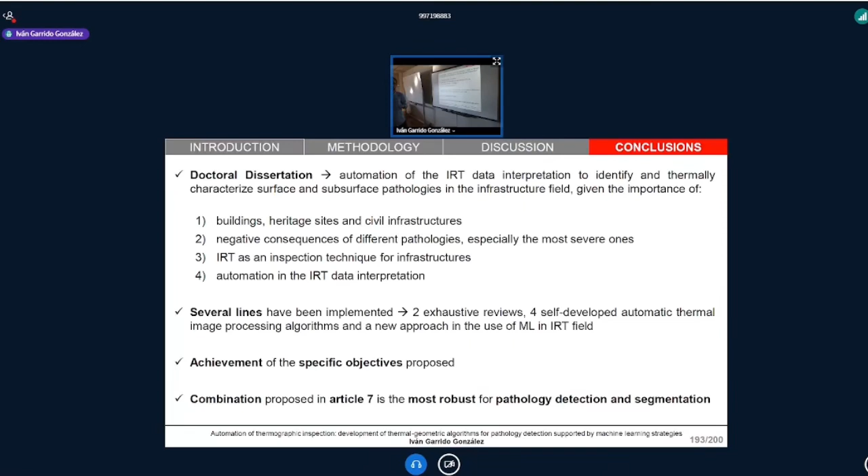With the achievement of all the specific objectives proposed, it should be highlighted that the combination proposed in the last paper is the most robust for pathology detection and segmentation. However, this combination is only adequate when a high number of dataset elements exist.

Otherwise, for short monitoring inspections, the more adequate choice will be the algorithm proposed in Article 5, that is the third algorithm. And for punctual inspections, the most adequate will be the algorithm proposed in Article 6, that is the last and fourth automatic algorithm.

It should be noted that the assumption of Article 5, that is the third algorithm, is still good despite following the assumption of Article 4 and not of Article 6, because the assumption of the third algorithm consists of searching for temperature differences along all the thermal images of our sequence and study, regardless of the possible number of Gaussian bands in our thermal images.

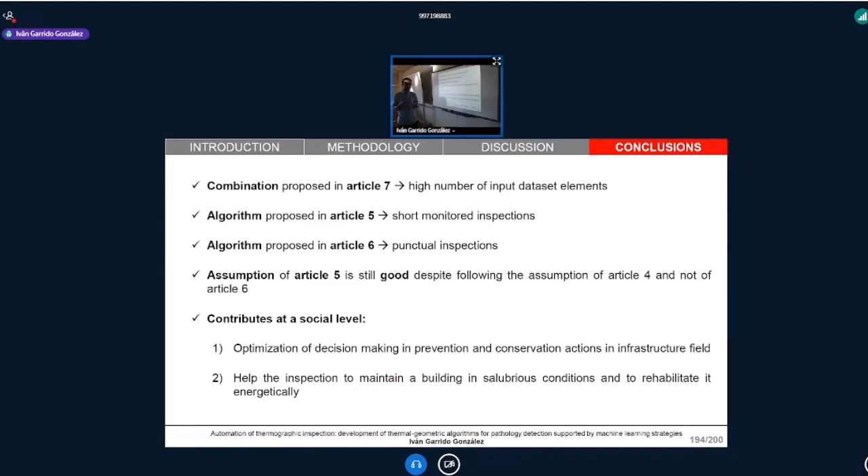Therefore, we contribute at a social level with the optimization of decision-making, prevention, and conservation actions in the infrastructure field, helping the inspector maintain a building in salubrious conditions and rehabilitate it energetically.

Future works will need to focus on these four main points.

The second future point will need to focus on improving the robustness of the algorithms of Articles 5 and 6, that is the third and fourth algorithm, in order to further reduce or eliminate noise, reflection, and shading problems. As for another future point, the use of techniques to generate synthetic thermal images is also an objective.

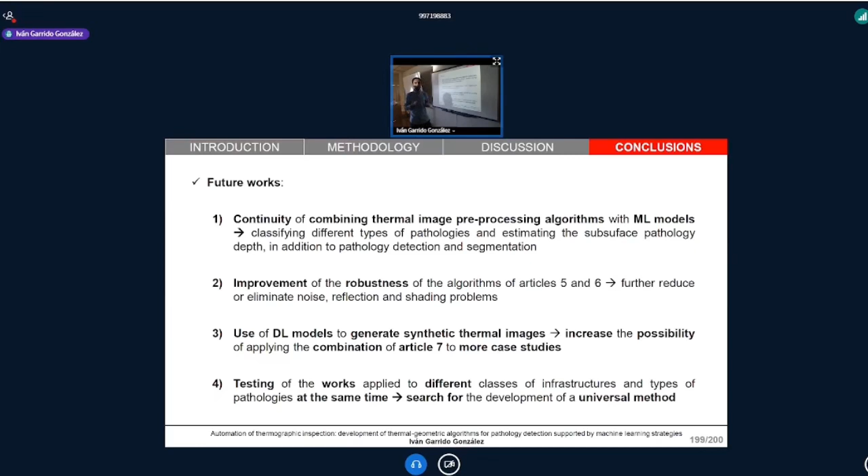And finally, the last and fourth future point is focusing on testing the proposed works applied to different classes of infrastructure and types of pathologies at the same time, in order to search for the development of a new universal method.